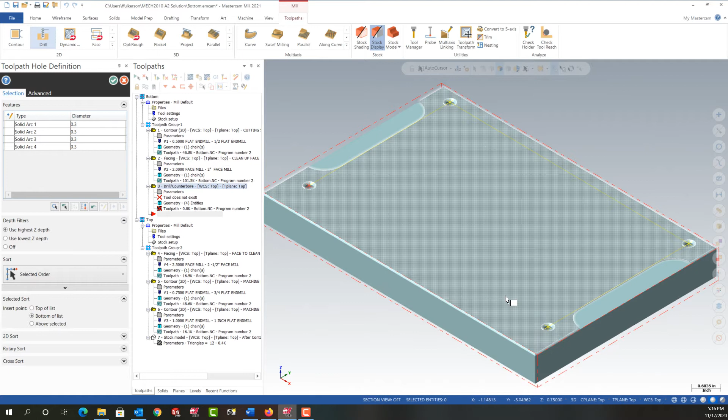So there I've selected all 4 holes. It shows me the order they'll be drilled in, and that's fine. I'll say OK. And this window will open up. So I'll go to Tool, select the Library tool. I'm going to go Filter. And this time I want to start with a spot drill, so it sees spot drill.

And I'm going to right click here and I'm going to tell it the diameter of an arc because I don't remember what size holes these are. So I'll select it and it's 0.3. So I'm just going to tell it to show me all spot drills that are greater than 0.3. And I'll say OK. And I see all my spot drills. I'm going to choose a 3/8 spot drill. So I select the 3/8 spot drill because when I read the sheet it says select appropriate tools.

Great. So I know these are 1/4 tapped holes. The drilling will go 0.650 deep, the tap will go 1/2 inch deep, and here I need to leave a 0.3 diameter 90-degree countersink that I can do with my 3/8 spot drill. So I have it selected, I'll say OK. And again, I want to follow what the sheet says for speeds and feeds. It says the cutting speed for all drills is 500. The feed per tooth is 5 thou.

And I'm going to add an appropriate comment with the caps lock on. So I'm going to say spot holes to leave the 25 thou chamfer. Next, I'm going to come down here to cut parameters. I want the drill counterbore cycle, and I forget what my RPM is. So I'm going to come back here to Tool. I forget everything. So I'm going to highlight this, and I'm going to press Control-C on my keyboard to copy it. Then back to cut parameters because the dwell time is important. So I'm going to put the equation. I'm going to say 1 divided by Control-V paste times 60, and there I have my dwell time.

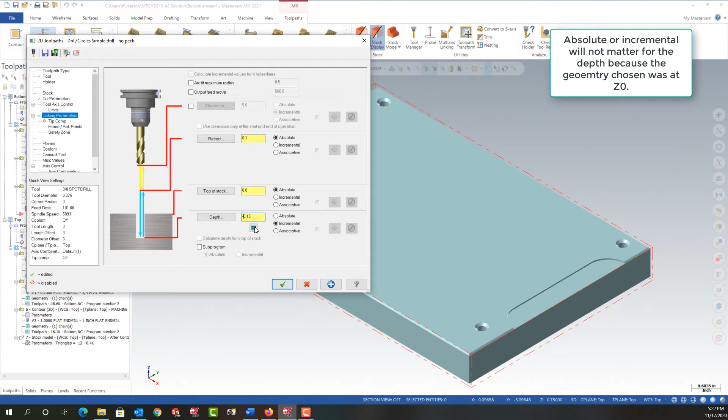So then I want to go to linking parameters. Again, I'm going to make these absolute. I'm just going to tell it to retract 100 thou above the part. That'll be lots. There's nothing in the way. And my depth, I'm going to right click here and I'll tell it to make the radius of an arc. I'll choose this arc here, and I just need to make that negative because it needs to go into the part. And if I wanted to, I could use Mastercam's depth calculator, but I'm not going to bother with that.

So the next thing I need to do, I want to double check everything. I have my cut parameters set up right. Have my linking parameters, so I need some coolant.

So I'm going to turn the coolant on, say OK. This toolpath looks good. So now I'm just going to copy and paste it and alter it to suit the remaining toolpath needs.

To do that, here it's highlighted. I'm going to select it. I'm going to push Control-C on my keyboard to copy, and I'm going to click here. I'm going to push Control-V, and now I've pasted it. So now this will become the drilling toolpath.

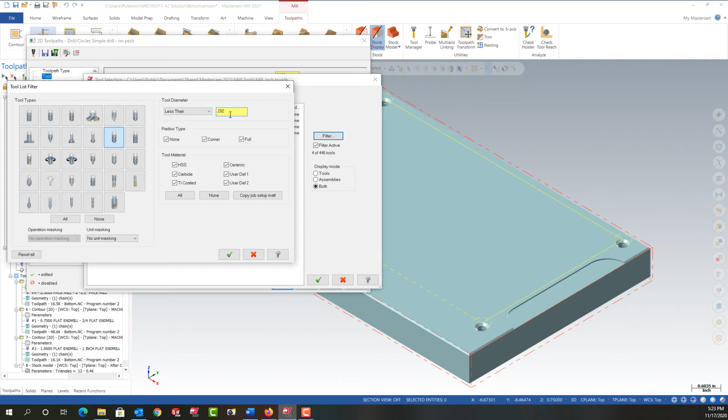So I'm going to click on the parameters, go back to the tool, select it from the library, filter, and now I don't want the spot drill, so I'm going to say none. I want just a regular drill, so I have to hover over these till I find it. Here it is, the drill. And I'm going to say show me all drills that are less than 0.202, because I know I want a 0.201 drill. So I'm going to say OK.

Just come down to the bottom of the list. Here it is, the number 7 drill. Select it. Again, I'll say OK. I'm going to put this back to 500 so it recalculates everything. And this time I'm going to tell it to drill the holes. And they're not leaving a chamfer, so I'll just get rid of that.

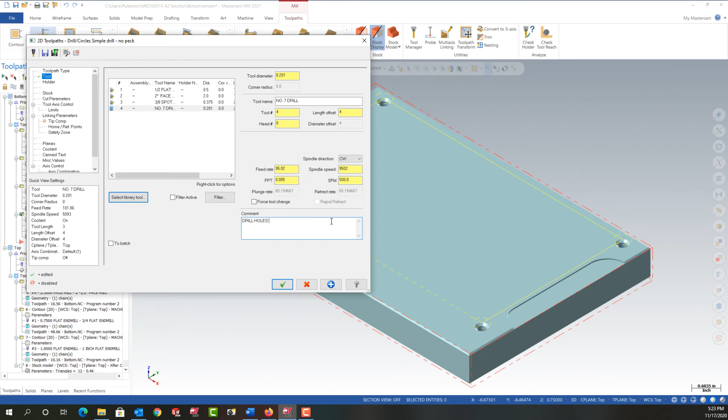So I've told it to drill the holes. I have the speed and feed recalculated. I'm going to come down here to cut parameters. I'm going to tell it I want the peck drilling cycle. And then I'm going to read, and it says, when peck drilling, make each peck 1/8 of an inch. So this needs to become 1/8 of an inch.

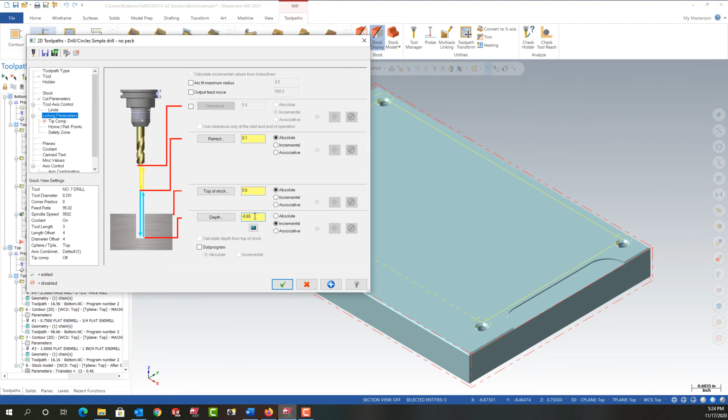I'm going to go to linking parameters. The depth is given to me as 0.650. Top of stock is still 0. Because I copied it, the coolant's on. I'll say OK. I'll regenerate that toolpath. I'll push Alt-S so I can see the cut line, and it goes down to the bottom of the hole.

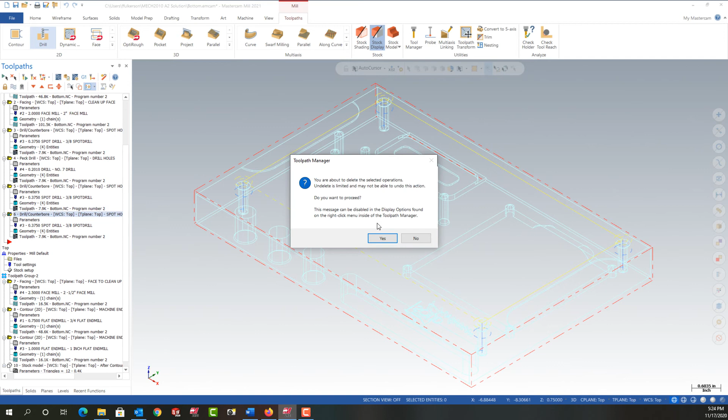And one more time, I'm going to copy this one. So Control-C again. Then I'm going to say Control-V to paste it, and I accidentally pasted it twice. So I'm just going to right click on this one and delete it. Tell it yes. So if I go back up, here's my spot drilling toolpath. Here's my drilling. This needs to become my tapping. So I'm going to select its parameters.

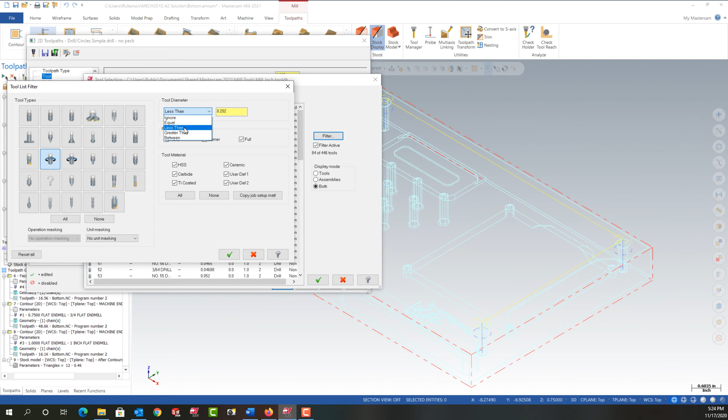Go to Tool, select Library Tool, Filter, None. This time I want a right-handed tap. And I'm going to say show me all taps that equal 1/4 inch. There'll be 2. I want the 1/4-20. I'll select it. I'll say OK. I'm going to set the RPM to 800 because that's what the sheet tells me to do. It should recalculate the feed to 40.

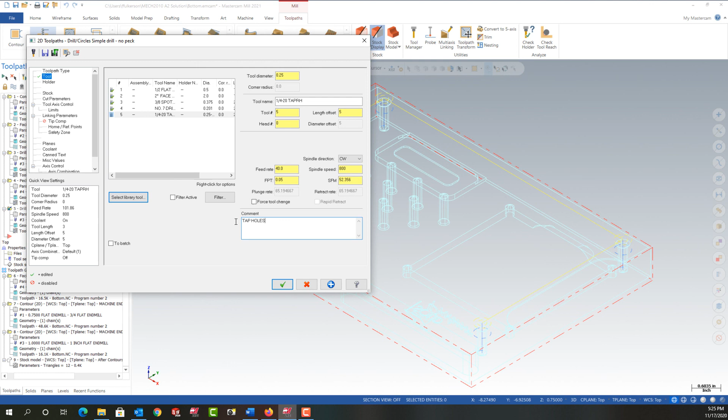And this time I'm going to set the comment to tap holes. And I forgot to turn caps lock on, so I'll do that again with the caps lock on. Remember, small letters won't load into most machines. So I'll go to the cut parameters. I'll change this to the tapping cycle. I'll go to linking parameters, and I'll change the depth to -1/2 inch.

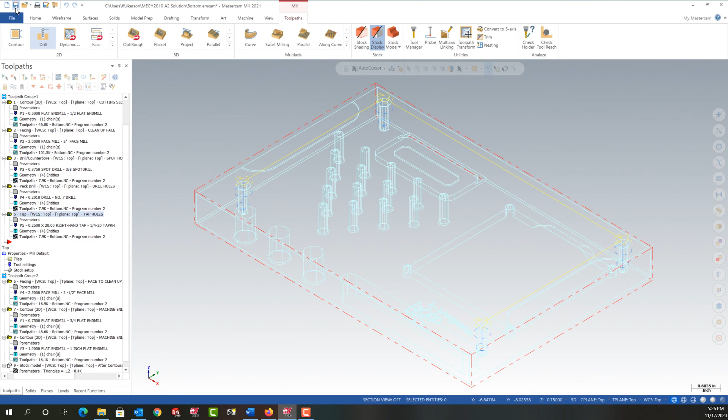I'll say OK. I'll regenerate that toolpath, and then I'll just double check. So I have my contour toolpath, I have my facing, I have my drill with the spot drill, I have my drilling, peck drilling with the 0.201 number 7 drill, and then I have my tap. This side is good and complete, so I'll save my work, and we'll continue there in the next video.